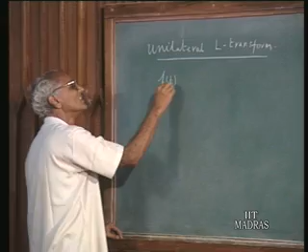In the Laplace transformation, the type of Laplace transformation that we talk about is what is called unilateral Laplace transform. So this is the type of Laplace transformation that we are going to talk about. What we mean by that is, we assume that f of t is 0 for t less than 0.

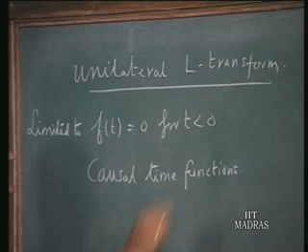So our discussion will be limited to f of t which is 0 for t less than 0, that means causal time functions. If indeed we have an f of t which fails to be 0 for t less than 0, we simply disregard the value of the function for negative values of time. We take it to be 0 even if it was not originally 0.

So our discussion will be confined to such functions, and this is not a great disadvantage, because in transient analysis of networks and systems some switching takes place at a particular point of time, and what follows that switching operation is what is important to us. We can always take the switching to take place at t equals 0, and the past history of the circuit, the network or system, is summarized in terms of the energy storage in certain elements, for example in electrical networks, in the reactive elements.

So the energy storage in the reactive elements at t equals 0, plus the knowledge of the excitation function from t equals 0 onwards for positive values of t, these two factors determine the response of the network uniquely for t greater than 0. Therefore, if you know the excitation function only for t greater than 0 and process that, that will not entail any loss of generality, because whatever is needed about the past history of the network is summarized by the conditions in the reactive elements.

So this does not lead to any loss of generality as far as transient performance is concerned.

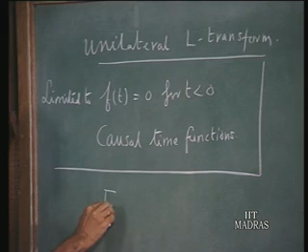Now, the Fourier transforms of certain time functions is what we have already derived. However, you would notice that Fourier transform does not exist for certain time functions.

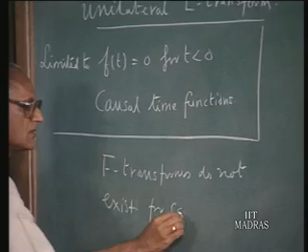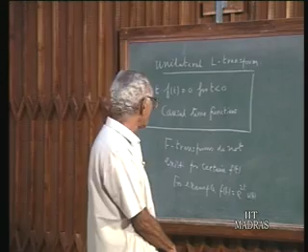For example, if f of t is e to the power of 2t, u of t, then the Fourier transform of such a function does not exist, because the defining integral for the Fourier transform, which is e to the power of 2t, e to the power of minus j omega t, dt, when you integrate from 0 to infinity, that integral does not converge. Therefore this does not exist.

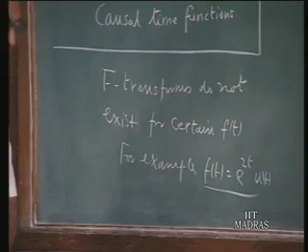So what the Laplace transformation does is enlarge the type of functions which are handled by Fourier transform. That means Laplace transform enlarges the type of functions for which we can find out the transforms. Certain functions for which Fourier transforms do not exist lend themselves to Laplace transformation, and therefore it enlarges the class of functions for which transforms can be found out.

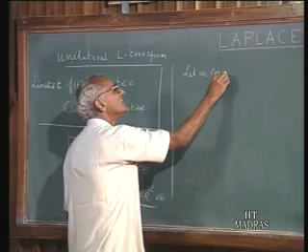How do we do that? To do that, let us consider the Fourier transform, not of f of t, but of f of t multiplied by e to the power of minus sigma t. So, given an f of t, we do not find the Fourier transform of that as such. Let us consider f of t e to the power of minus sigma t, where sigma is chosen to ensure the existence of the Fourier transform of e to the power of minus sigma t, f of t.

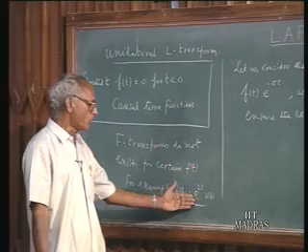So, even if f of t does not have a Fourier transform, if you multiply f of t by a suitable factor e to the power of minus sigma t, it is possible for us to have a Fourier transform. For example, if e to the power of 2t is multiplied by e to the power of minus 3t, then it becomes e to the power of minus t, and the Fourier transform exists.

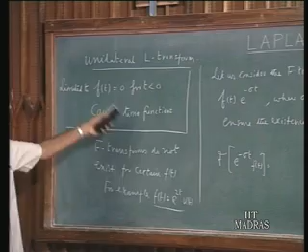So, let us see the Fourier transform of e to the power of minus sigma t f of t, by the definition. I will consider the Fourier transform of e to the power of minus sigma t f of t u of t, because I mentioned we are assuming this f of t in our Laplace transformation technique to be those functions for which the value is 0 for t less than 0. To make it explicit, I am putting f of t u of t.

Therefore, the Fourier transform of f of t u t - this makes it very clear that this product will have 0 value for negative values of time. This is equal to the integral of f of t e to the power of minus sigma t e to the power of minus j omega t dt. And since we are talking about f of t u t, the integrand has 0 value for negative values of time. Therefore, this is from 0 to infinity instead of minus infinity to plus infinity, because f of t u t makes it 0 for negative values of time.

So, f of t e to the power of minus sigma t e to the power of minus j omega t dt, and this will be equal to the integral from 0 to infinity of f of t e to the power of minus sigma plus j omega t.

If the Fourier transform of f of t u t is f of j omega, then instead of minus j omega t, you have minus of sigma plus j omega t. Therefore, this will be a function f of sigma plus j omega instead of j omega, and I will call this f of s, where s is a complex variable having the dimensions of frequency and is given by sigma plus j omega.

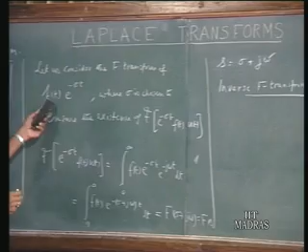How do we find this? The inverse Fourier transform of this must give us back f of t e to the power of minus sigma t. So f of t e to the power of minus sigma t is the inverse Fourier transform of this function. So, how do we find the inverse Fourier transform?

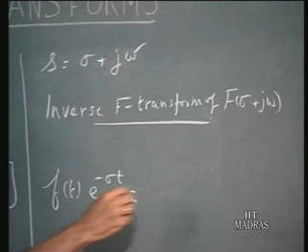Our usual formula: 1 over 2 pi, integral from minus infinity to plus infinity, now this is in terms of omega, because that is the defining inverse Fourier transform relation for the Fourier transform relation. If the integration is in terms of omega, this is f of sigma plus j omega, e to the power of j omega t d omega. That is the inverse Fourier transform of this f of sigma plus j omega, and if you apply the inverse Fourier transform, you must recover back your original function f of t e to the power of minus sigma t.

Now, from this you can multiply both sides by e to the power of sigma t, then you get 1 over 2 pi. Now, I am multiplying this by e to the power of sigma t, and since e to the power of sigma t is independent of omega, which is the variable of integration, I can push it inside the integral sign without disturbing any value. So, I can write this as f of sigma plus j omega, e to the power of sigma plus j omega t, d omega.

Now the range of integration is from minus infinity to plus infinity in omega. But I would like to put this in terms of the new variable s we have taken. If s equals sigma plus j omega, and omega is the one which is varying, then ds equals j d omega, since omega is the variable factor.

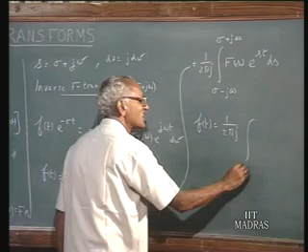F of sigma plus j omega is f of s, and e to the power of sigma plus j omega t equals e to the power of st. Since d omega equals ds upon j, I write this as ds, giving a factor of 1 over 2 pi j. So this means f of t equals 1 over 2 pi j, integrated from sigma minus j infinity to sigma plus j infinity, of f of s e to the power of st ds.

So let us summarize what we have done so far. We are thinking of finding the Fourier transform of f of t, but such functions do not lend themselves to Fourier transformation.

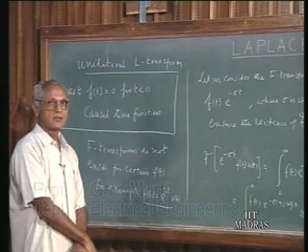So what we can do is try to decrease its growth by multiplying by a function like e to the power of minus sigma t, and by choosing a suitable value of sigma, we can make sure this function decreases with increasing t such that the Fourier transform integral converges.

So we are associating with f of t a convergence factor e to the power of minus sigma t, and this value of sigma depends upon the particular f of t you choose. Naturally, for each f of t there is a certain minimum value of sigma which we should have. We will see about that.

So after borrowing e to the power of minus sigma t as a convergence factor, we find the Fourier transform of e to the power of minus sigma t, f of t, u of t, because we are going to talk about functions which are zero for negative values of time. Therefore, the Fourier transform integration, instead of starting from minus infinity, can start from zero itself, because the integrand will be zero for negative values of time.

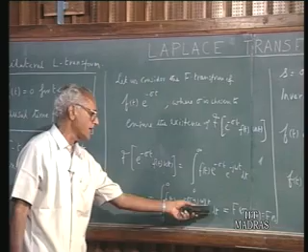Consequently, the Fourier transform of this will be f of sigma plus j omega, where instead of j omega we have sigma plus j omega, because that is now the variable we would like to treat as the new variable. So f of s is therefore f of t e to the power of minus sigma plus j omega t dt, which means f of t e to the power of minus st dt.

After finding f of s, which is f of sigma plus j omega, if you would like to get back your original function of time, first we find the inverse Fourier transform, which is f of t e to the power of minus sigma t, and multiply that by e to the power of sigma t, which then gives you f of t, which goes like this, and finally you end up with this.

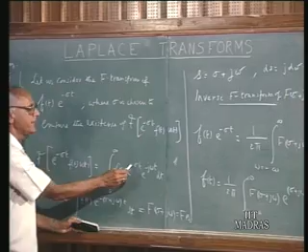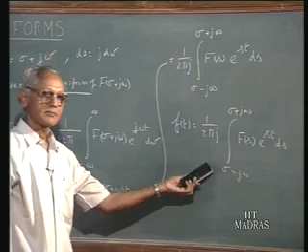So instead of always talking in terms of Fourier transforms using this convergence factor, we may straight away talk in terms of a transformation with reference to the variable s. We can say that given a function f of t, you have a transformation obtained by multiplying f of t by e to the power of minus st and integrating from 0 to infinity, giving f of s. Once you have f of s, you can get f of t using this inverse transformation, and these two relations constitute the two central relations of Laplace transformation.

So the origin of Laplace transformation as an offshoot of the Fourier transformation is what we have discussed now, but let us hereafter straight away define the Laplace transformation relations and then study the various properties.

So, given any function f of t, we will indicate its Laplace transformation as f of s, where s is a complex frequency variable, which has a real part sigma and an imaginary part omega. And so we indicate the function of time and its Laplace transform pair in this manner.

F of s is obtained from a given f of t by this defining integral, 0 to infinity of f of t e to the power of minus st dt, and this is called the Laplace transform integral.

The inverse Laplace transform is obtained from the Laplace transformation f of s by this relation: 1 over 2 pi j, integral of f of s e to the power of st ds. The limits of this integration I will explain in a moment.

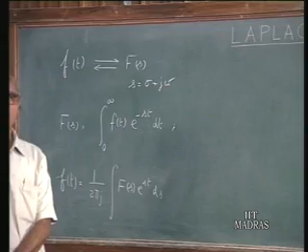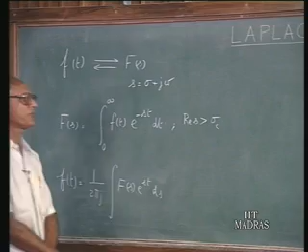For this integral to exist, there must be a convergence factor. E to the power of minus sigma t is a convergence factor built into the Laplace transformation. So depending upon the type of function f of t we are considering, there is a certain minimum value of the real part of s that we would like to have. The real part of s for this integral to exist must be larger than a certain value, sigma c, which depends upon the function f of t. This sigma c is called the abscissa of convergence.

When deriving the Laplace transformations of various functions, we will briefly have a look at the abscissa of convergence that is required, and we assume the real part of s is greater than this. Fortunately, we do not have to keep track of the abscissa of convergence in routine work, because we always assume that the s value we are using has a real part which exceeds the abscissa of convergence for the particular function or set of functions we are dealing with.

However, when you want to substitute a particular numerical value of s in certain cases, you have to pay regard to the abscissa of convergence, and make sure the numerical value of s you want to put into the expression satisfies that its real part is greater than sigma c. Normally we do not have to bother about the abscissa of convergence in our routine work.

So in this transformation, if you take this complex plane, the S plane, with sigma and omega, there is a certain abscissa of convergence, sigma c. That sigma c depends upon the particular function we are dealing with, as I mentioned.

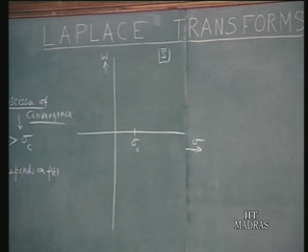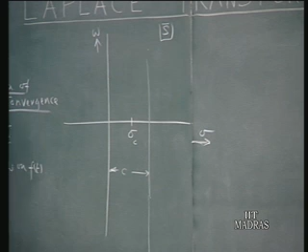In the inverse Laplace transform integration, recall that when we derived this from the Fourier transform theory, we said sigma minus j infinity to sigma plus j infinity. Instead of that, I will simply put c minus j infinity to c plus j infinity, where c is a value like this. So we do this integration from c minus j infinity to c plus j infinity, where c is the real part of S. Instead of sigma, I am using the value c just for convenience.

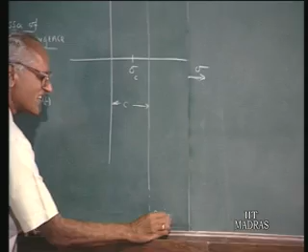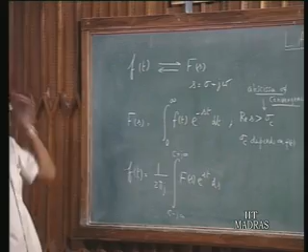So c minus j infinity to c plus j infinity is the contour of integration. We start from c minus j infinity and integrate up to c plus j infinity in this direction. This is what is called the Bromwich contour. In literature this is called the Bromwich contour, and so we are integrating this f of s e to the power of st along a vertical line in the complex frequency plane along the Bromwich contour, c minus j infinity to c plus j infinity, where the value of c is greater than sigma c, the abscissa of convergence.

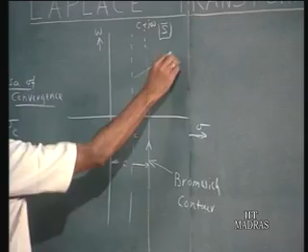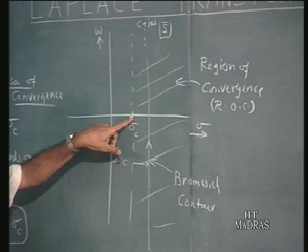So what we have is that sigma c defines the region of convergence of the Laplace transformation integral, often abbreviated as ROC. The Laplace transformation exists provided the value of S is in this region of convergence, meaning the real part of S must be larger than sigma c, the axis of convergence. So the real part of S, given by sigma, must be greater than sigma c.

As far as the integration in the inverse Laplace transformation is concerned, we take a vertical line in the region of convergence. That means the real part of S could be any general value c, but that c should be larger than the axis of convergence sigma c. So these two are the fundamental relations relating to the Laplace transformation.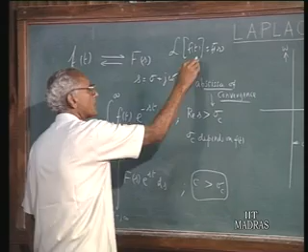We can also abbreviate this: the Laplace transform of f of t we can write as f of s, and the inverse Laplace transform of f of s is equal to f of t. This is the alternate way of writing the forward transformation and the transformation in the reverse direction. So this is the general relation we need to keep in mind, and before we proceed further, let me make a few comments.

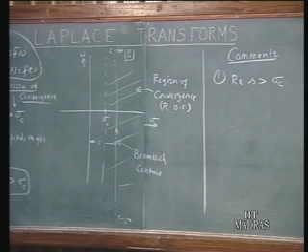First, we say that the real part of S should be greater than the abscissa of convergence, and this must be kept note of whenever we want to substitute numeric values of S, as I mentioned earlier. Normally, we do not have to keep track of sigma c in our usual routine work.

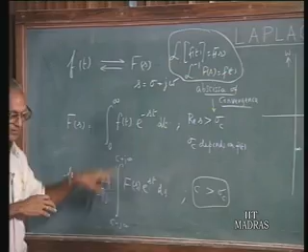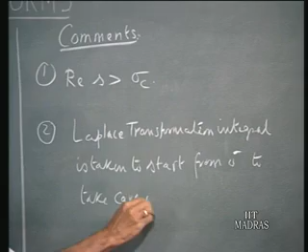Secondly, if f of t has impulses at the origin, then when you integrate from 0 to infinity, the impulse is sitting right at the origin. So to take care of the impulses present at the origin, we need to integrate through the impulse. Therefore, we must start the integration from 0 minus. So the Laplace transformation integral is taken to start from 0 minus to take care of impulses at the origin, if any, in f of t. So, f of s we take it as starting from 0 minus to infinity of f of t e to the power of minus st dt.

If f of t does not have any impulse at the origin, it does not matter whether you take it from 0, 0 plus, or 0 minus. But if f of t has impulses at the origin, and if you want to include those impulses in your transformation, you must start the integration from 0 minus. So, normally when we define the Laplace transformation integral, we take it starting from 0 minus to infinity to take into account these impulses also.

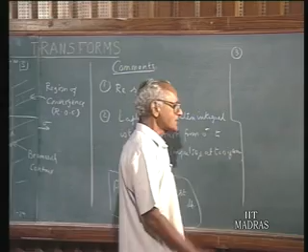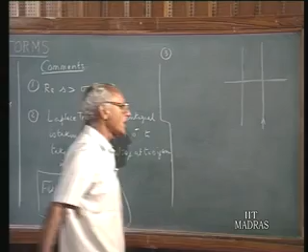A third point which we would like to note is that in the complex frequency plane, this is the Bromwich contour, and we are taking the integration along this, and as you move along this line, you are incrementing omega. So you can divide this entire contour into small intervals of width delta omega, and suppose the center point is omega I.

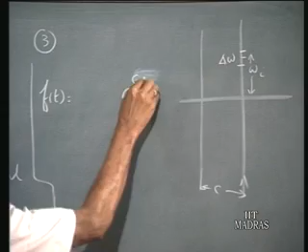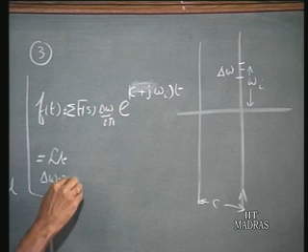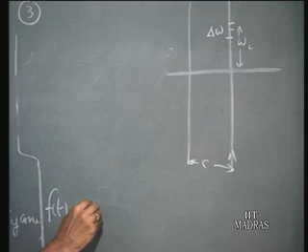Then we can think of f of t as composed of elementary exponential signals of the form e to the power of sigma, suppose this is c, e to the power of c plus j omega I t, e to the power of c plus j omega I t, this exponential signal, but with a coefficient density given by f of s times delta omega over 2 pi, and we take the summation of all such signals. In other words, we take this as the limit as delta omega tends to 0. Let me rewrite this more clearly. F of t can be thought of as the summation, as delta omega goes to 0, of a number of elementary exponential signals of the form e to the power of c plus j omega I t.

This is an exponential signal sitting at this point in the complex frequency plane, and its coefficient is f of s delta omega by 2 pi, because this is the coefficient density. We can treat this as a coefficient density just as we are treating it in the case of the Fourier transform. Now, in the case of the Laplace transform, the coefficient density is f of s, because the complex frequency signal is e to the power of st rather than e to the power of j omega I t, and the density is defined as so much coefficient per cycle per second.

Therefore, delta omega by 2 pi is what we have taken, and if you take this limit, then this becomes an integral, and instead of delta omega we are putting d omega. Therefore, this can be taken as 1 over 2 pi j integral of f of s e to the power of st ds, ds by j becomes d omega, and c plus j omega I is the running variable s, therefore e to the power of st, and we take the limit from c minus j infinity to c plus j infinity. So, this is the defining relation, the inverse Laplace transform relation.

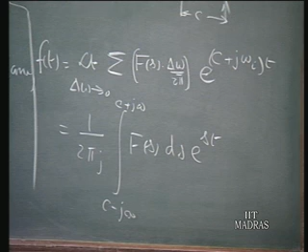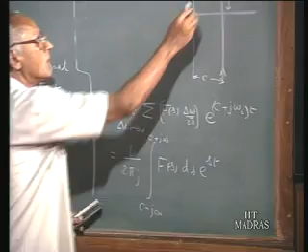So, even here, just as in the case of Fourier transforms, we can think of f of t as composed of a number of exponential signals, where omega I runs from minus infinity to plus infinity along this Bromwich contour, and at each particular spot frequency, there is a certain coefficient density given by f of s, and so the coefficient of this exponential signal, concentrated in this small elemental width, can be thought of as f of s times delta omega over 2 pi.

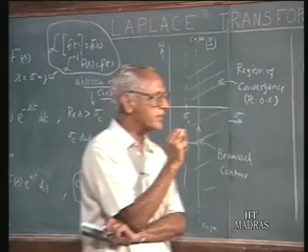This is the coefficient density multiplied by the width, the coefficient of this particular exponential signal, and we take the summation of all such elemental signals along this line, then this becomes this integral. So just as the Fourier integral splits up f of t as an infinite summation of exponential signals of type e to the power of j omega t, the Laplace transform also can be thought of as splitting up f of t as a number of elementary exponential signals of type e to the power of st, where s is a variable along this Bromwich contour, having a coefficient density equal to f of s. Therefore the particular coefficient of e to the power of st would be f of s ds over 2 pi j. That is what we are having. This is an interpretation which will be useful later when we talk about the system function h of s, just as we talked about the system function h of j omega when dealing with Fourier transform theory.

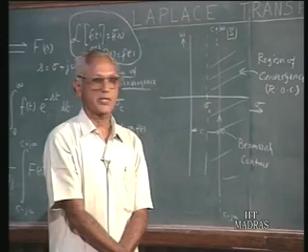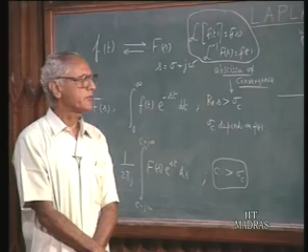So this is generally what we need to know about the introduction to the concept of Laplace transformation, the defining Laplace transformation relation, and the inverse Laplace transformation relation. Now we will take up the question of Laplace transforms of various important time signals f of t and find out the abscissa of convergence for each of these in a routine fashion. We will take that up next after having introduced ourselves to the concept of Laplace transformation.

To start with, let us note the conditions for the existence of Laplace transform. This condition is usually stated as f of t should be of exponential order.

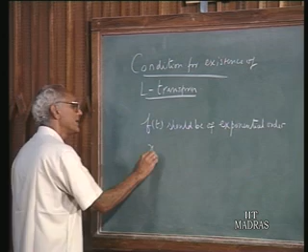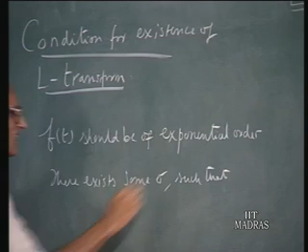In other words, f of t cannot grow for positive t more than an exponent of some value. In other words, there exists some real value sigma such that the limit as t goes to infinity of e to the power of minus sigma t times f of t goes to 0. So there must be some real value sigma such that as t goes to infinity, e to the power of minus sigma t pulls down the value of f of t to negligible proportions. For example, if f of t is e to the power of 2t, then e to the power of minus 3t makes it go down to 0. So depending on f of t, you can choose the value of sigma, and sigma should be larger than the abscissa of convergence as we have seen.

Or we can put this as: the limit as t tends to infinity of e to the power of minus st times f of t goes to 0, for real value of s greater than some value sigma. So that is what we are having - this is the abscissa of convergence. So e to the power of minus st times f of t, as you push t to infinity, must go down to 0, becoming negligibly small. So the value of the real part of s must satisfy this condition with sigma c, which is the abscissa of convergence, depending upon the particular function f of t that we have on hand. In other words, to put this in a very compact fashion, we say f of t should be of an exponential order.

Now we will take up Laplace transformation of important time functions, important functions of time.

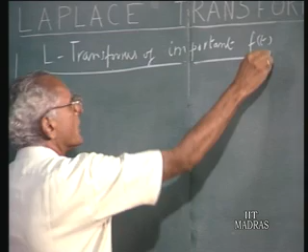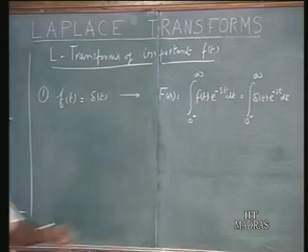To start with, let f of t be delta t, an impulse at the origin. So f of s equals the integral from 0 minus to infinity of f of t times e to the power of minus st dt. This is the defining integral for the Laplace transformation. In our particular case, f of t is delta t, so we integrate delta t times e to the power of minus st dt from 0 minus to infinity. The characteristic of delta t times e to the power of minus st is that this is equivalent to delta t times the value of this function evaluated at t equals 0, that is 1. In other words, we are integrating delta t dt over the interval 0 minus to infinity, which includes t equals 0. Therefore, the value of this is equal to 1.

So, delta t has the Laplace transformation equal to 1, just like in the case of the Fourier transform, delta t is equal to 1. This is also the same case here, f of s is equal to 1. So I will write here a list of f of t and the corresponding f of s, and the corresponding abscissa of convergence sigma c.

So as and when we derive the Laplace transformations, we enter them here. So delta t, the Laplace transform is 1. As far as the abscissa of convergence is concerned, it does not matter what value of s, what is the real part of s, it will always be 1. It does not depend upon this, so we may as well put this as nothing. We do not have any special particular restriction on the real value of s.

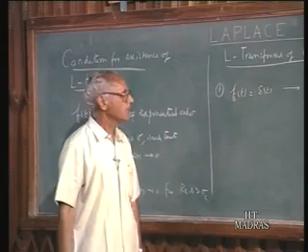Now let us take f of t as u of t, the unit step function. Then we find the Laplace transform f of s as the integral from 0 minus to infinity, and in this range of integration u of t happens to be equal to 1. Therefore, I can write u of t times e to the power of minus st dt, and since u of t is equal to 1, I may as well drop that and write e to the power of minus st dt, because u of t in this range of integration is equal to 1. Therefore, this will be e to the power of minus st divided by minus s, evaluated from 0 to infinity.

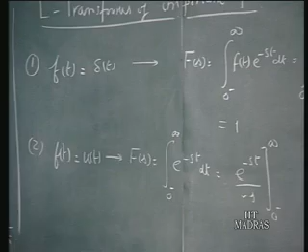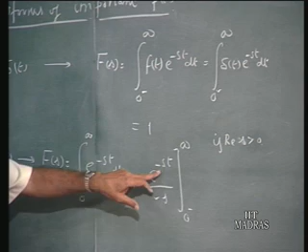And now, at the upper limit, we have e to the power of minus infinity times t, minus s times infinity. So if the real value of s is greater than 0, then you have say minus a small real value of s times t. Therefore this will be e to the power of minus sigma plus j omega t, where sigma is the real part of s.

So as long as sigma is positive, real part of s is greater than 0, that means as long as sigma is positive, when t goes to infinity, the magnitude of this, which is governed by e to the power of minus sigma t. After all, this is equal to e to the power of minus sigma t times e to the power of minus j omega t. The magnitude of this is 1 irrespective of the value of t, but the magnitude of this depends upon sigma and t. As long as sigma is positive and t goes to infinity, this goes to 0.

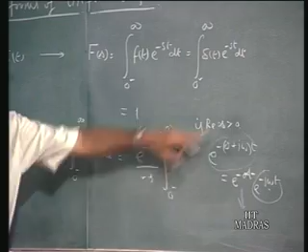Therefore, at the upper limit, we make sure that this goes to 0 by taking the real part of s to be greater than 0. Therefore that is what we assume, and so at the upper limit this is 0, at the lower limit when t equals 0, this is equal to 1. Therefore this becomes 1 over s, and therefore f of s, the Laplace transform of f of t, which is u of t, will be 1 over s, provided we take the real part of s to be greater than 0.

And that means the integral will converge only if you take that particular condition, and that means the abscissa of convergence sigma c happens to be 0, which is the real part of s, minimum value of real part of s that we should have. So we have the relation now that the Laplace transform of u of t is 1 over s, and this Laplace transformation is valid as long as the real part of s is greater than 0. That means sigma c is 0, that means the real part of s must be some positive value which is larger than 0, of course.

So these are the two important functions for which we have found out the Laplace transformation. Let us move on.

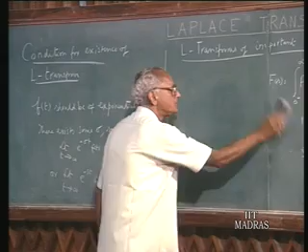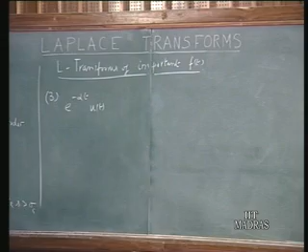Okay, now we will take a third function, e to the power of minus alpha t times u of t. Then we take the Laplace transformation. Now, e to the power of minus alpha t times u of t, of course, is 1 in this range of integration.

Times e to the power of minus st dt, which is equal to the integral from 0 minus to infinity of e to the power of minus alpha plus s times t dt, which is equal to e to the power of minus s plus alpha times t divided by minus of s plus alpha, evaluated between the limits 0 minus to infinity.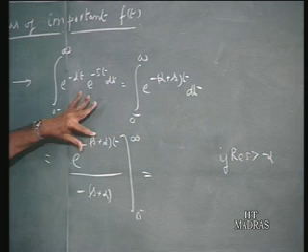Once again we would like to make the integral converge at t equals infinity by making sure that the real part of s plus alpha is positive, greater than 0. So when the real part of s is greater than minus alpha, at the upper limit real part of s plus alpha is greater than 0. Therefore, as t goes to infinity, this integral becomes 0. At the lower limit 0, this will be equal to 1. Therefore, with the minus sign already here, this will be 1 over s plus alpha.

So for the function e to the power of minus alpha t u(t), the Laplace transform is 1 over s plus alpha, and this integral will converge provided the real part of s is greater than minus alpha. We are taking alpha to be real in this case.

Now as far as this integration is concerned, it does not matter even if you take e to the power of minus z t, where z is complex, then we go through the same argument, same analysis. It will be 1 over s plus z, provided the real part of s is greater than minus the real part of z. That is, the real part of s plus z is greater than 0, even if this is e to the power of minus z t u(t).

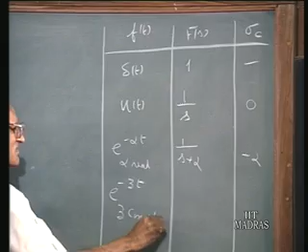So alpha need not be real, it could even be a complex number. Even if z is complex, the same relationship will be valid. So I will write here: e to the power of minus alpha t, alpha real, gives 1 over s plus alpha; e to the power of minus z t, z complex, gives 1 over s plus z, provided the real part of s is greater than minus the real part of z.

So once we have this relation, we can find out the Laplace transformation of trigonometric functions. Suppose I take cos(omega naught t) u(t). This can be written as 1/2 of e to the power of j omega naught t u(t) plus e to the power of minus j omega naught t u(t).

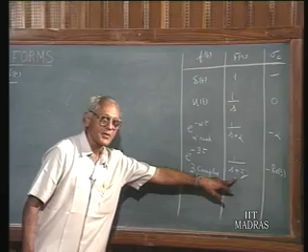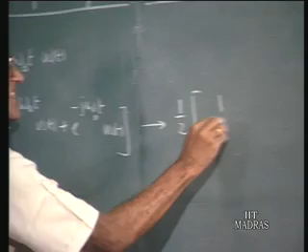Since we found that e to the power of minus z t has 1 over s plus z as its Laplace transform, instead of z we have j omega naught. Therefore the Laplace transformation of that term would be 1/2 of 1 over s minus j omega naught, because e to the power of minus z t had the transform 1 over s plus z; instead of minus z you have j omega naught, so you get s minus j omega naught. And the Laplace transformation of the other exponential term would be 1 over s plus j omega naught.

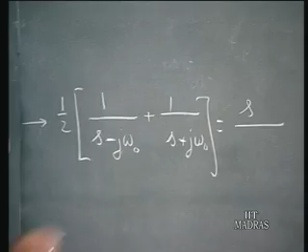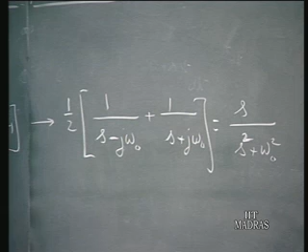So if you complete this, when you rationalize, the denominator becomes s squared plus omega naught squared, and the numerator becomes 2s; dividing by 2, this becomes s over s squared plus omega naught squared.

In a similar fashion, if you find the Laplace transformation of sin(omega naught t) u(t) as 1 over 2j times [e to the power of j omega naught t u(t) minus e to the power of minus j omega naught t u(t)] — since the sine function can be described this way — this can be written as 1 over 2j times [1 over s minus j omega naught minus 1 over s plus j omega naught]. In the numerator you get 2 j omega naught by rationalizing the denominator, and this 2j cancels, so you get omega naught over s squared plus omega naught squared.

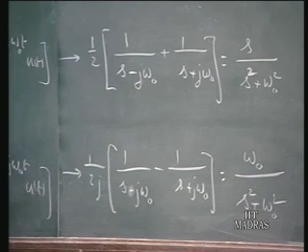So that is what we have. In this derivation, the abscissa of convergence should be minus the real part of z. Here z is purely imaginary, so the real part of this is 0. That means the abscissa of convergence for both these transforms is 0.

So we have the final result: cos(omega naught t) — I can also write this as omega t, as long as you do not confuse this omega with the imaginary part of s — transforms to s over s squared plus omega naught squared, and sin(omega naught t) transforms to omega naught over s squared plus omega naught squared. This u(t) continues with us because we are assuming this function to be 0 for negative values of time, and the abscissa of convergence for this is 0.

So that is what we have for the sine function and the cosine function, which are truncated at t equals 0. That means the sine and cosine exist only for positive values of time.

Now we can represent the poles and zeros of these f of s in the complex frequency plane. For example, these are all rational functions, therefore the poles and zeros exist for this.

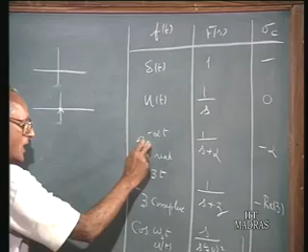As far as delta t is concerned, it has neither poles nor zeros. As far as u of t is concerned, there is a pole at the origin. As far as the Laplace transform of e to the power of minus alpha t is concerned, it is 1 over s plus alpha, therefore there is a pole at minus alpha.

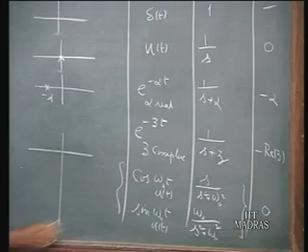Forget about this z. Taking these, for cos omega naught t and sin omega naught t, there are 2 poles at plus j omega naught and minus j omega naught. The zeros will depend upon the cosine function or the sine function, as the case may be.

Now you observe that the abscissa of convergence in all these cases is 0. Therefore, the region of convergence is the region to the right of the rightmost pole. In all these cases, the region of convergence, defined by the abscissa of convergence, is to the right of the rightmost pole. In this case, there are only 2 poles, and that means the entire region to the right of these poles is the region of convergence. That means the region of convergence is defined by the extreme pole, the rightmost pole that you have for the particular function. More about this we will take up in the next lecture.

To summarize what we have done today: we said that Fourier transforms of certain time functions which grow exponentially do not exist, and to take care of such situations we can think of introducing a convergence factor e to the power of minus sigma t. So instead of finding the Fourier transform of f of t, we can think of the Fourier transform of f of t times e to the power of minus sigma t, then find the inverse Fourier transform and reintroduce, cancelling out this e to the power of minus sigma t which we introduced in the first place. So both these formulas lend themselves to the Laplace transformation formula.

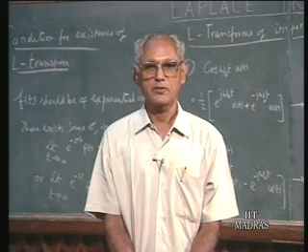We do not have to introduce e to the power of minus sigma t artificially if we introduce a new variable s, which is sigma plus j omega. So the Laplace transformation evolves from such considerations, and we have f of s given as the integral of f of t times e to the power of minus st, from 0 minus to infinity, and the inverse Laplace transform is 1 over 2 pi j times the integral from c minus j infinity to c plus j infinity of f of s times e to the power of st ds. This integration is along a vertical line in the region of convergence. The region of convergence is defined by the half plane where the real part of s is greater than a particular value, called the abscissa of convergence, and this abscissa of convergence depends upon the particular function we have on hand.

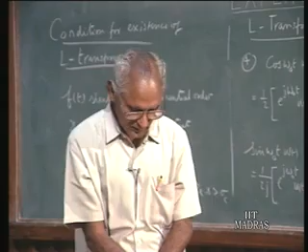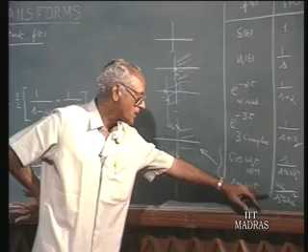We then took up the consideration of Laplace transformation of various important time functions. In particular, we found the Laplace transformation of the unit impulse function at the origin, which happens to be 1 itself; the Laplace transformation of the unit step function, which is 1 over s, a particularly simple relation; and e to the power of minus alpha t times u of t, whose Laplace transformation is 1 over s plus alpha. Then cos omega naught t and sin omega naught t reduce to simple Laplace transformations of the type s over s squared plus omega naught squared, and omega naught over s squared plus omega naught squared.

We will continue this discussion in the next lecture by enlarging the class of functions for which we find the Laplace transformation, and also we will look at some of the important properties of the Laplace transformation as such.